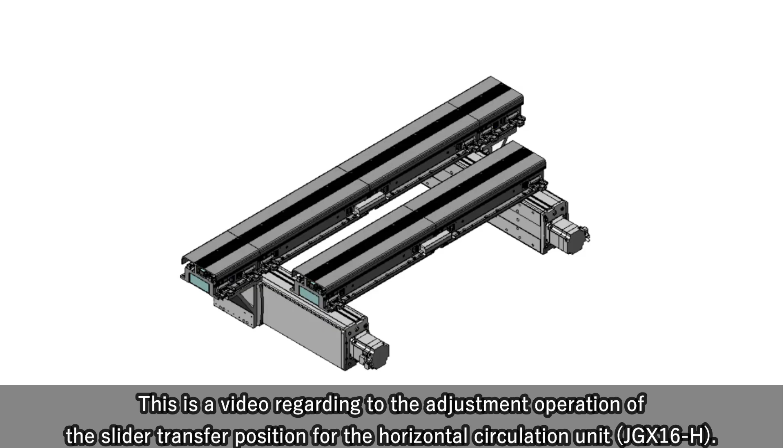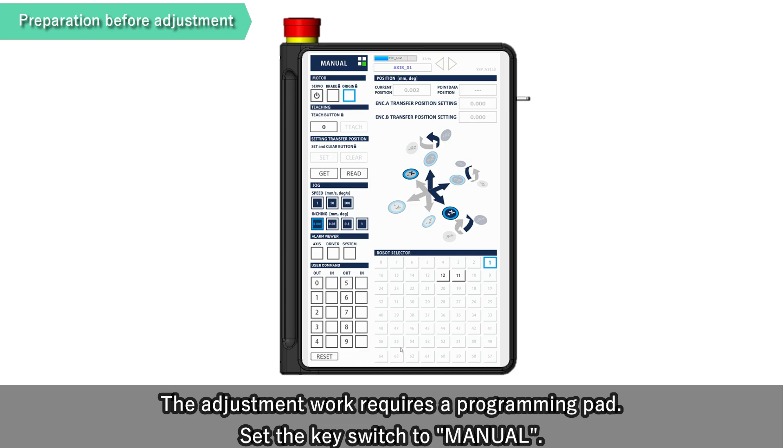This is a video regarding the adjustment operation of the slider transfer position for the horizontal circulation unit. The adjustment work requires a programming pad. Set the key switch to manual.

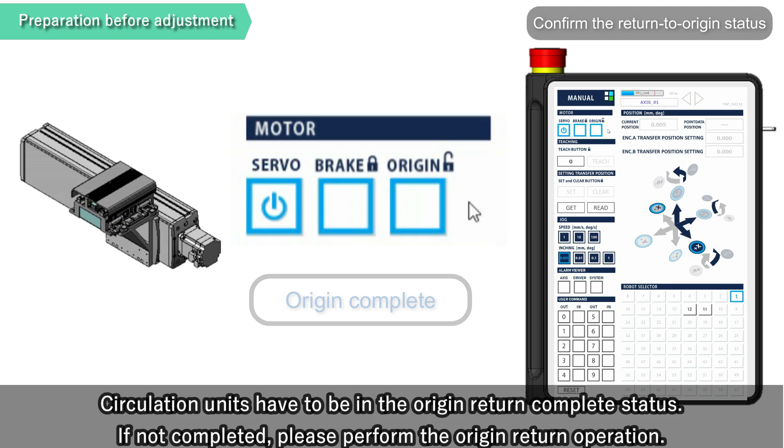Circulation units have to be in the origin return complete status. If not completed, please perform the origin return operation. For how to perform the origin return operation, please refer to the video, LCMR200 software setup programming pad.

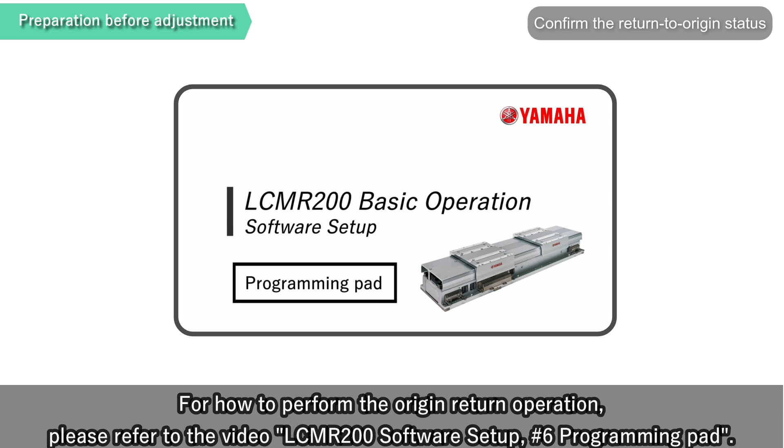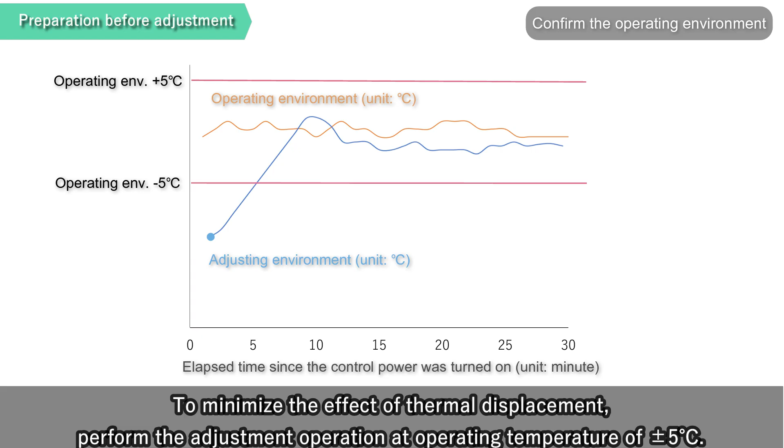Decide point numbers to be used as points to teach as transfer positions beforehand. To minimize the effect of thermal displacement, perform the adjustment operation with an operating temperature difference within ±5 degrees Celsius. Also, start the adjustment operation at least 20 minutes after turning on the control power of the modules to be adjusted.

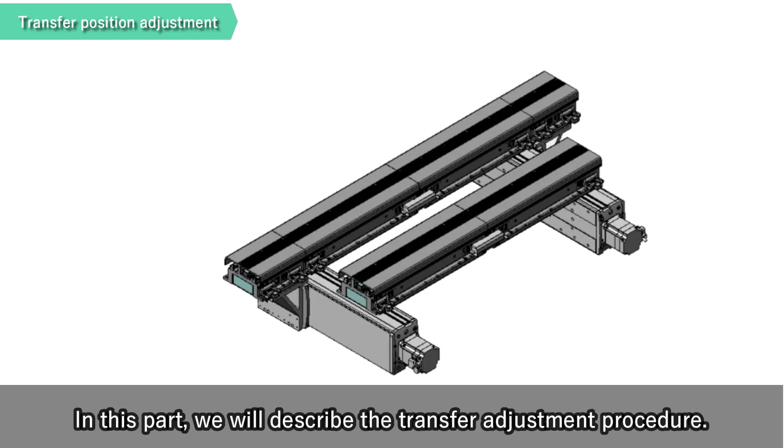Please prepare an accuracy measuring jig. The jig can be purchased from Yamaha. In this part, we'll describe the transfer adjustment procedure. For the accuracy measurement operation, remove the module cover of both the movable module and fixed module of the circulation unit.

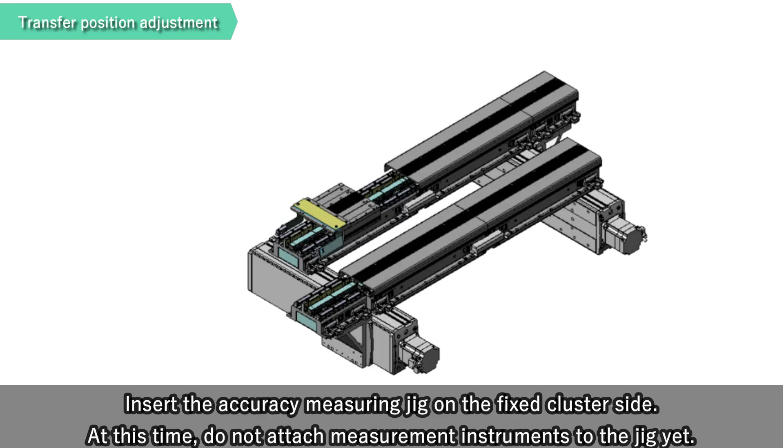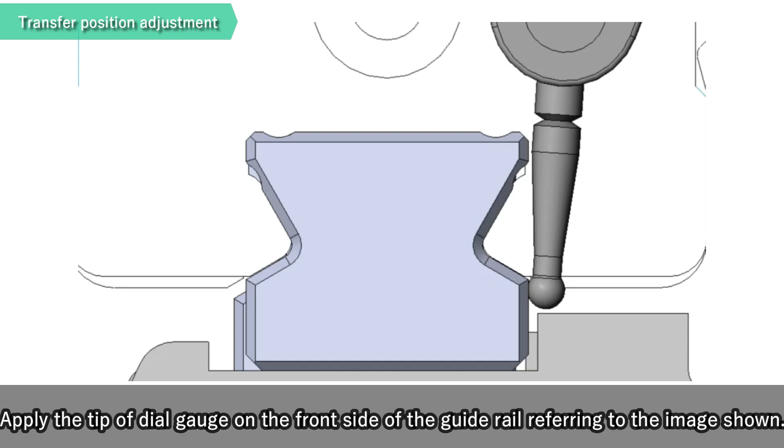Insert the accuracy measuring jig on the fixed cluster side. At this time, do not attach measurement instruments to the jig yet. Attach the dial gauge to the jig. Apply the tip of the dial gauge on the front side of the guide rail referring to the image shown. For correct measurements, make sure that the tip of the dial gauge touches the appropriate measuring surface and does not touch any other part.

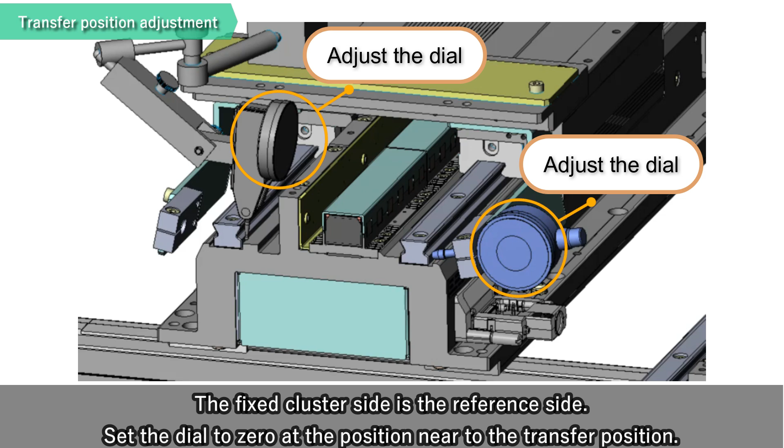The fixed cluster side is the reference side. Set the dial to 0 at the position near to the transfer position. Turn on the servo of the junction axis and move the module to the transfer position by jog operation. Please make sure the circulation unit and the jig do not come into contact.

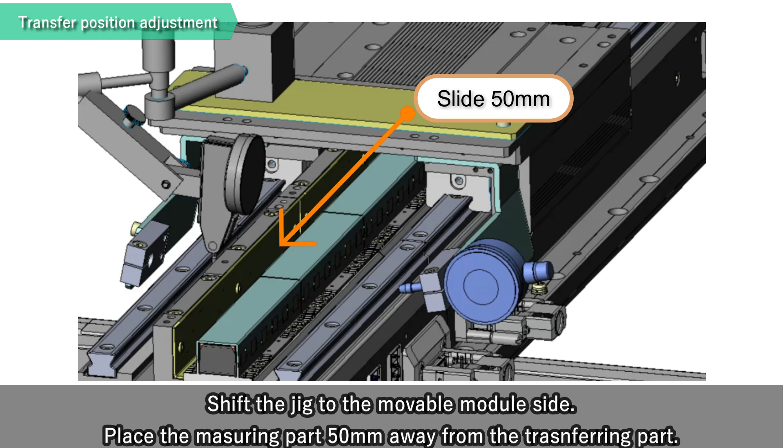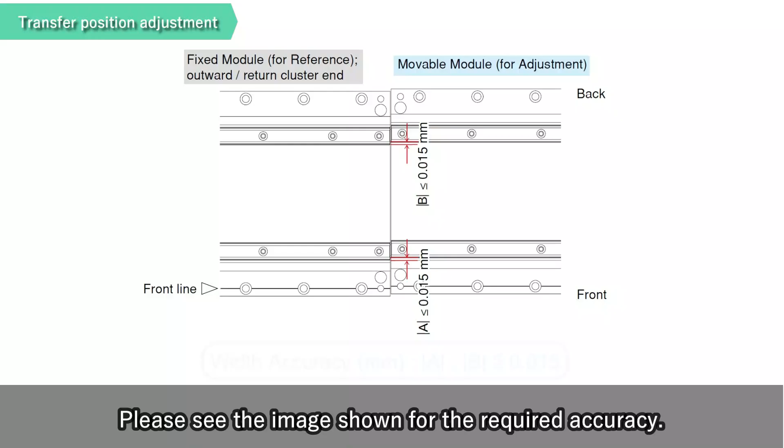Shift the jig to the movable module side. Place the measuring part 50 mm away from the transferring part. Adjust the movable module position to meet the required accuracy of junction. Please see the image shown for the required accuracy. In order to extend the service life and reduce the transfer operation noise, please make the absolute value of the misalignment smaller.

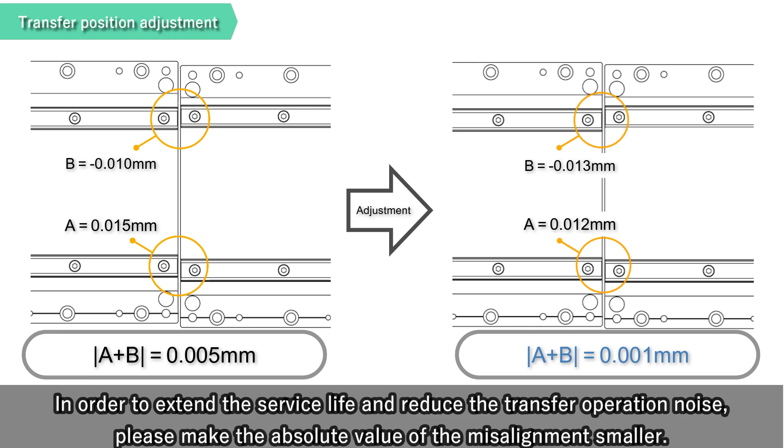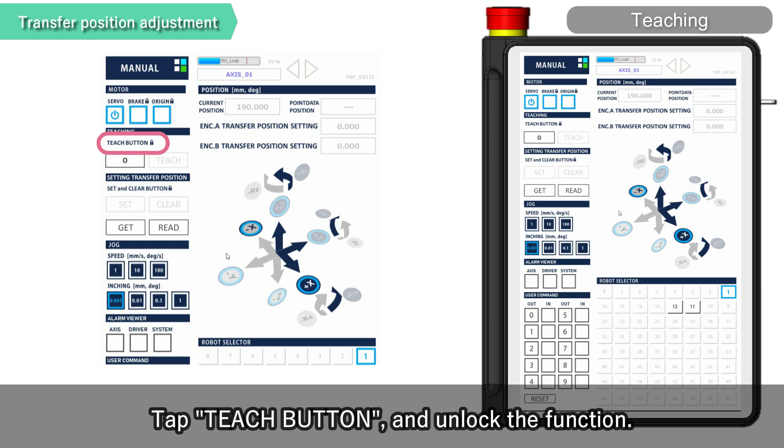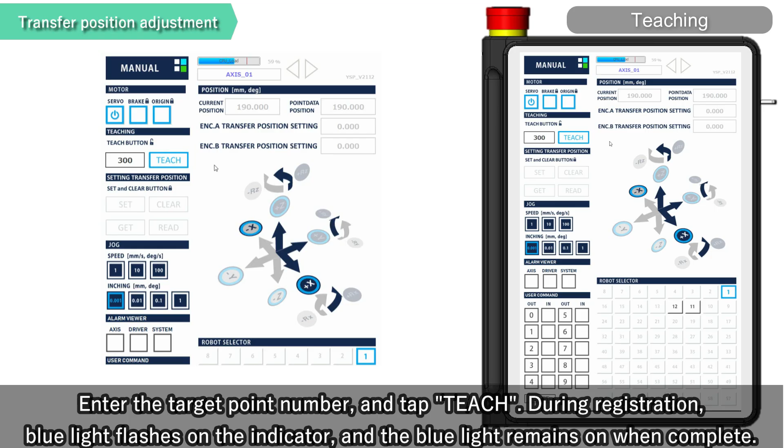After the adjustment, please proceed to the teaching and transfer position correction setting. Please make sure not to move the movable module or change the servo status until all work is completed. Tap Teach button and unlock the function. Enter the target point number and tap Teach. During registration, blue light flashes on the indicator and the blue light remains on when complete. After the completion, tap Teach again to turn off the blue light.

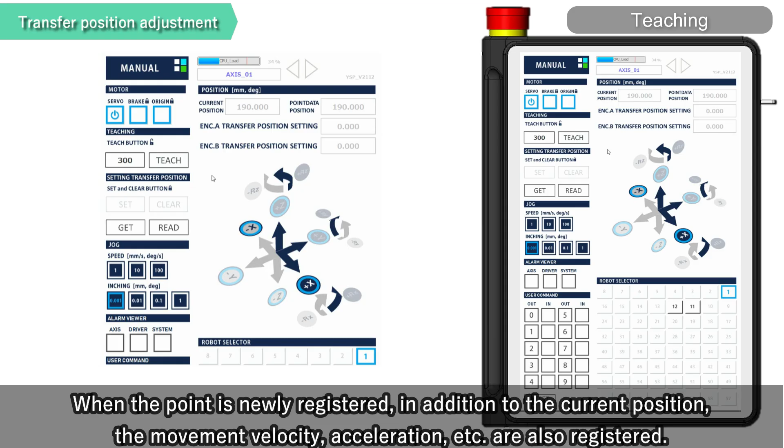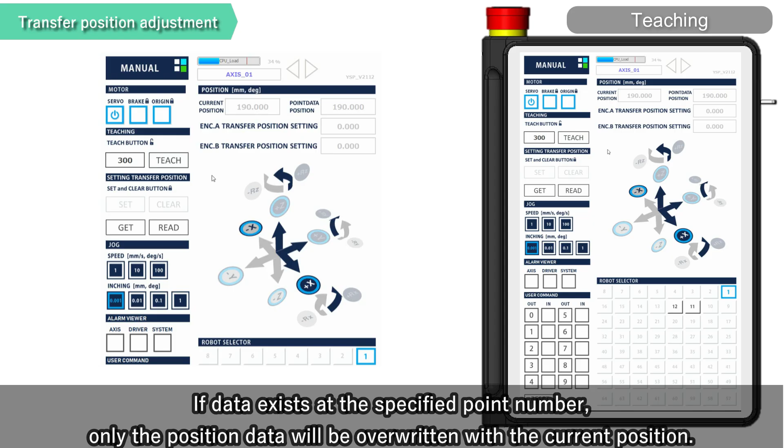When the point is newly registered, in addition to the current position, the movement velocity, acceleration, etc. are also registered. If data exists at the specified point number, only the position data will be overwritten with the current position. Users can check the position data registered in the point data from point data position.

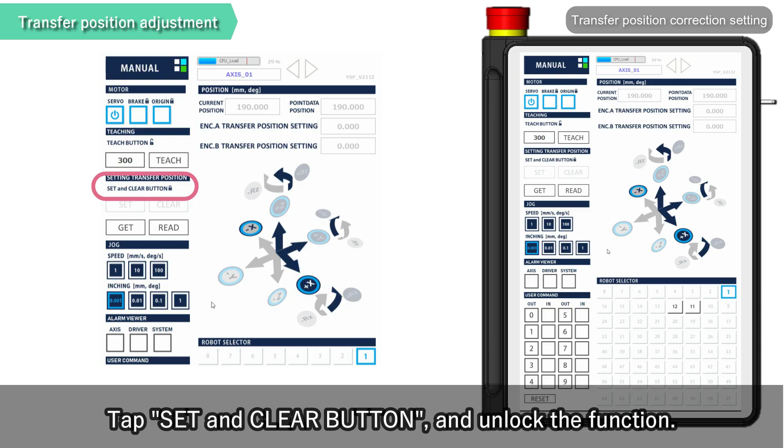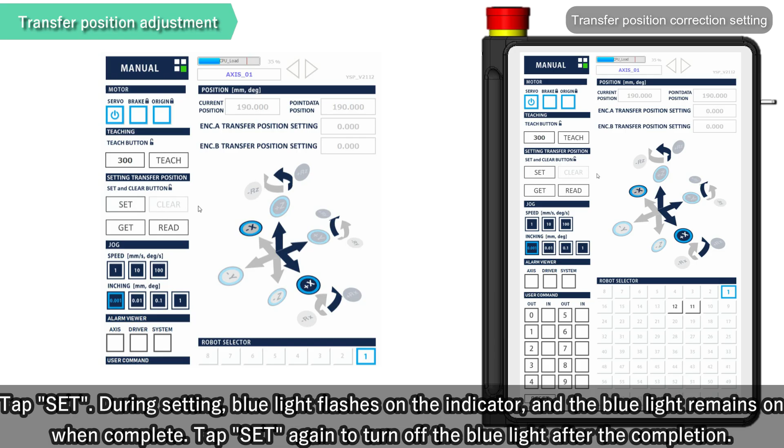Tap Set and Clear button and unlock the function. Tap Set. During setting, blue light flashes on the indicator, and the blue light remains on when complete. Tap Set again to turn off the blue light after the completion. That is all for the transfer adjustment procedure. For all transfer positions, perform accuracy measurement and adjustment, teaching and transfer correction settings in the same procedure.

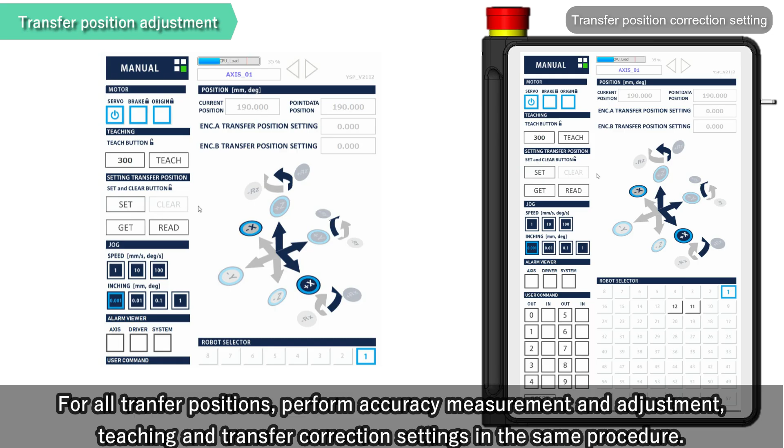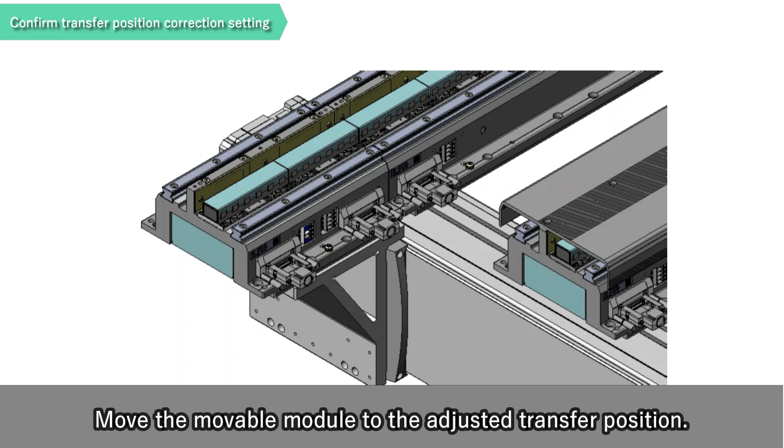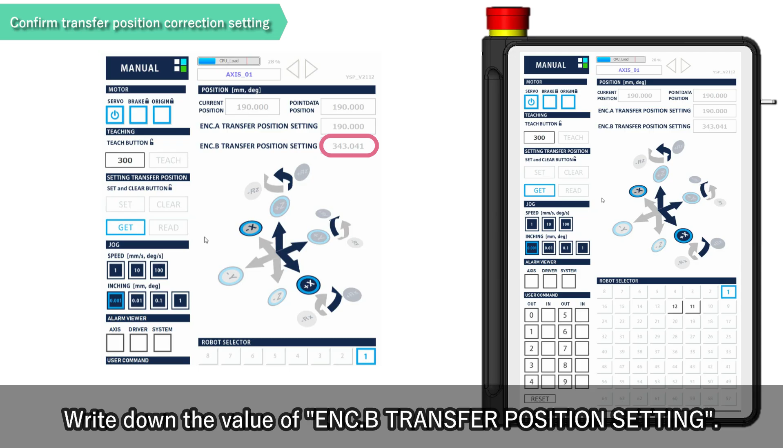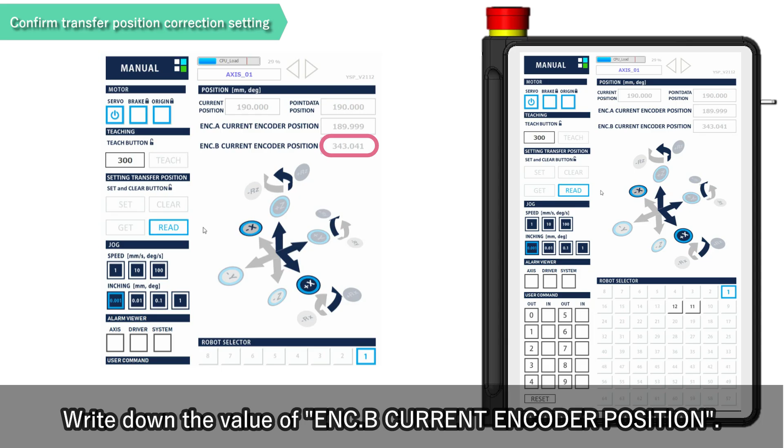In this part, we'll describe the procedure for checking the transfer position correction settings. Move the movable module to the adjusted transfer position. To read out the correction setting information, tap Get. Write down the value of encoder B transfer position setting. To read out the current information of the encoder B, tap Read. Write down the value of encoder B current encoder position. If the value of the correction setting and the current encoder value match, the correction setting has been registered correctly.

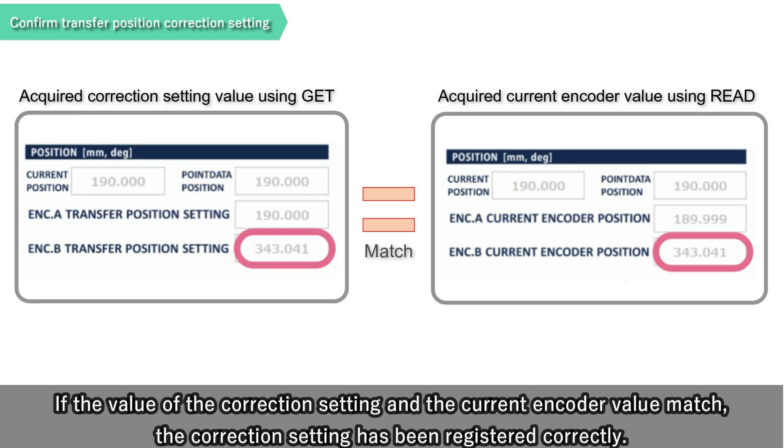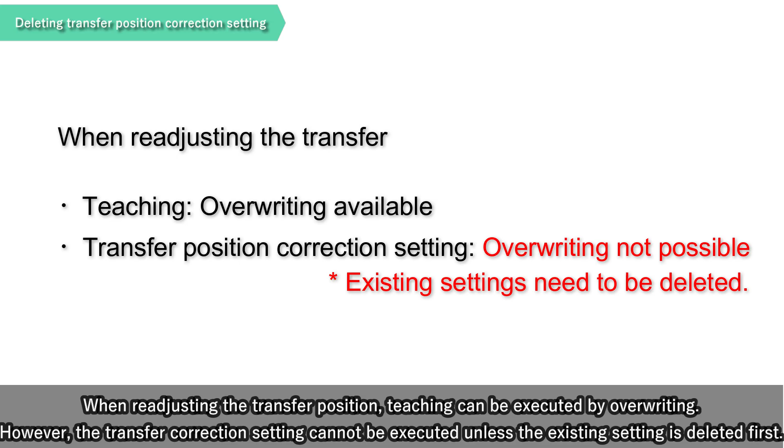When readjusting the transfer position, teaching can be executed by overwriting. However, the transfer correction setting cannot be executed unless the existing setting is deleted first. In this part, we'll describe the procedure to delete the transfer position correction setting. Move the movable module of the circulation unit to the transfer position to be readjusted.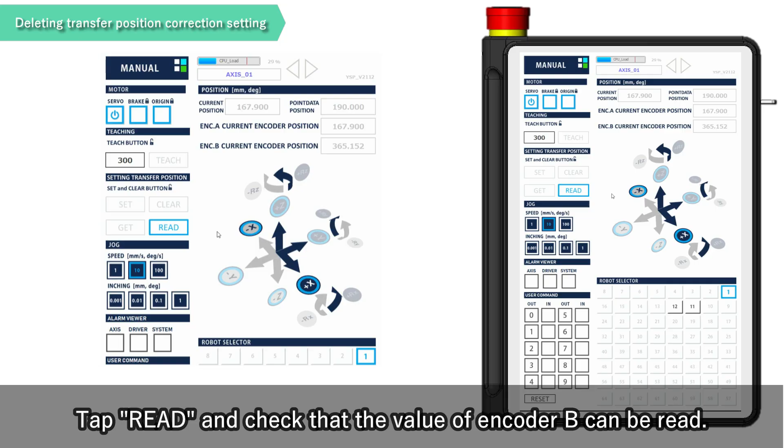Tap Read and check that the value of encoder B can be read. If an alarm occurs, the value of encoder B has not been read. Adjust the position of the movable module. Turn off the servo of the junction axis of the circulation unit.

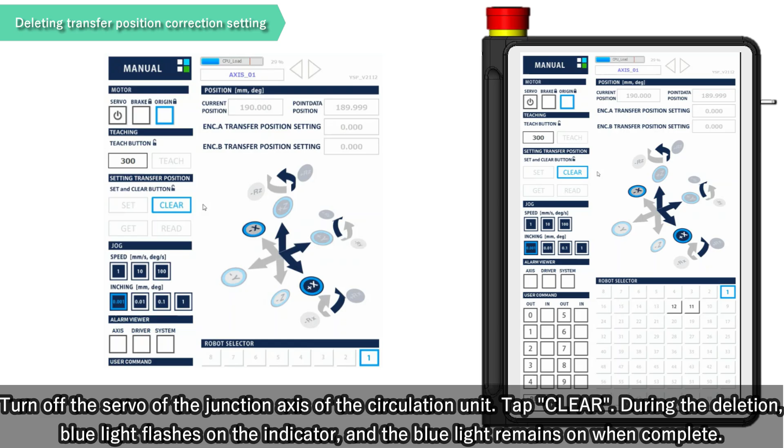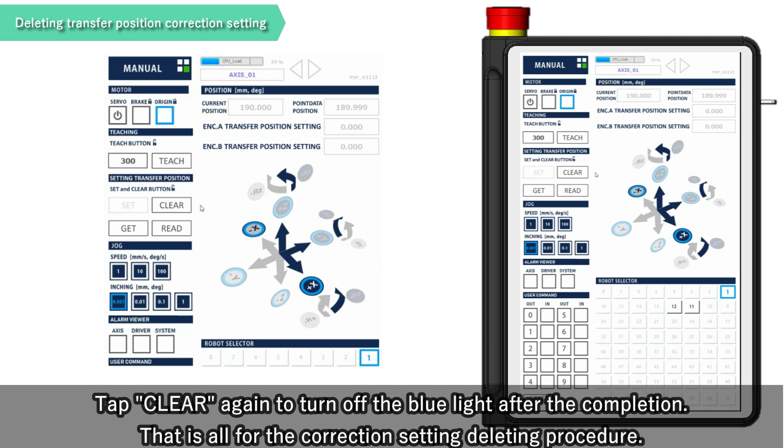Tap Clear. During the deletion, blue light flashes on the indicator, and the blue light remains on when complete. Tap Clear again to turn off the blue light after the completion. That is all for the correction setting deleting procedure. This is the end of this video, transfer adjustment for horizontal circulation unit.